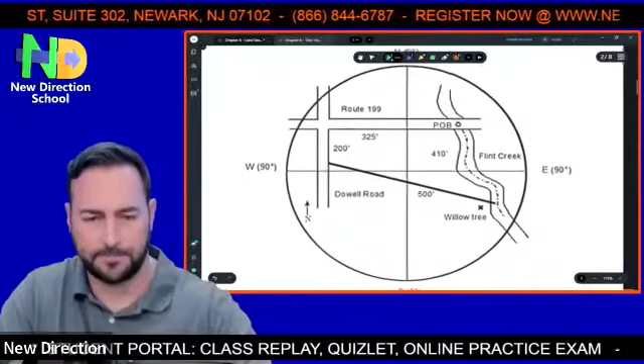Now, this is a typical description. So we're going to look at this image right here, and we're going to identify our property. Ready? Just by looking at it, do you know what your property is? This should be easy because there's only one property here, right? But how do we get to it? How do I identify it? Here's the description.

It says a parcel located in Bucks County, Pennsylvania, having the following description: commencing or beginning at the intersection of the south line of Route 199 and the middle of Flint Creek, thence southeasterly along the center thread of Flint Creek, 410 feet more or less to the Willow Tree landmark. Thence north 65 degrees west, 500 feet more or less to the east line of Dowell Road, and thence north 2 degrees east, 200 feet more or less along the east line of Dowell Road to the south line of Route 199, and thence north 90 degrees east, 325 feet more or less along the south line of Route 199 to the point of beginning.

That's easy, right? We got it, right? Yeah. Some of you are shaking your head at home like, well, this is the easiest description, by the way. Some of you are like, oh my God, how am I going to remember this? I'm going to show you how easy this is.

First of all, let's remove a code word over here. Ready? This word means 'then.' It's as simple as that. So we begin at one point and then we go to another point. That's what it is.

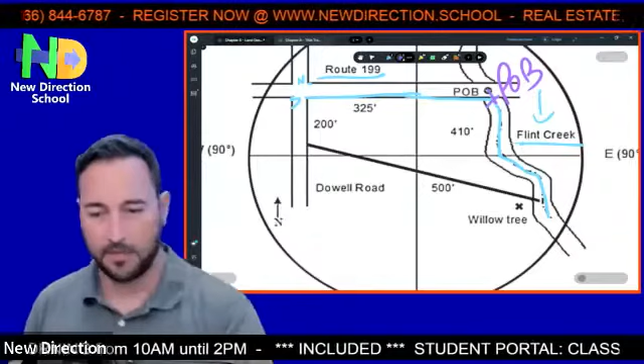So next thing we're going to do is go along this southeasterly until we find what? The willow tree right here. That's the next point. Now that we got here, 410 feet down, more or less. Okay, we're going to go to the next point.

And it says we're going to go north 65 degrees west, 500 feet more or less until we get to the east line of Dowell Road. Now, here's the cool thing, guys, as realtors, we don't have to calculate the degrees and all that stuff, but it's good to know what we're looking at. Surveyors will handle this for us, but it's good to know what we're looking at.

So, 65 degrees, and we're gonna go 500 feet more or less, right? To where? Dowell Road. As soon as we met Dowell Road, right? But it says west line or east line? East line, right? Because this is west, this is east. Okay? And by the way, I forgot to mention, every map will have this right here.

An indicator where north is. So all you have to do is remember where south is, which is the opposite, right? And then where's west and where's east. So you do have to know these two, west and east. North is easy, south is easy. What people usually get confused is with west and east. Why? Because we read left to right, so we say east and west, right?

This is what we're going to talk about. Believe me, if I showed you the images from the previous books, it would be even more complicated. I try to make this as easy as possible.

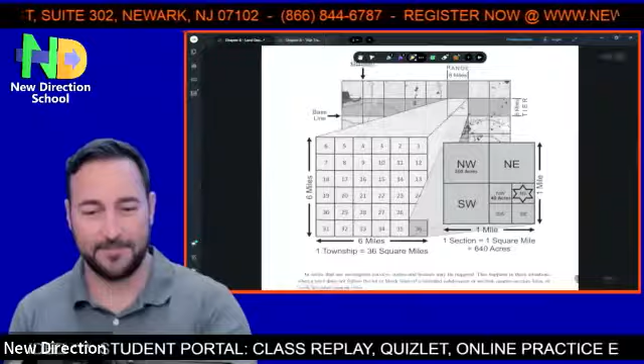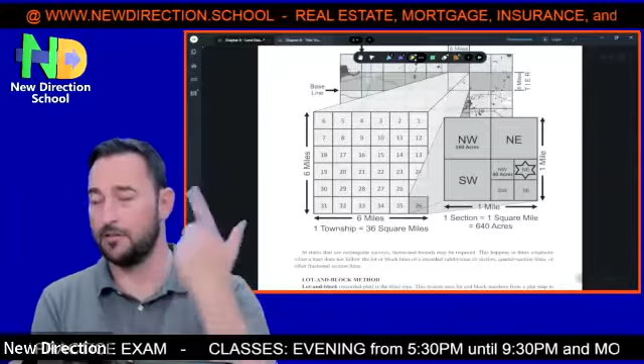That's the township, the state, cities around. We found the township, divided into a bunch of squares. Each square is a section, further divided into more squares or halves. Parcels - a parcel is a piece of land. It could be defined either by metes and bounds, by the rectangular survey system, or the lot and block method.

First you have subdivisions. So we have a big parcel and we can subdivide it into smaller ones.

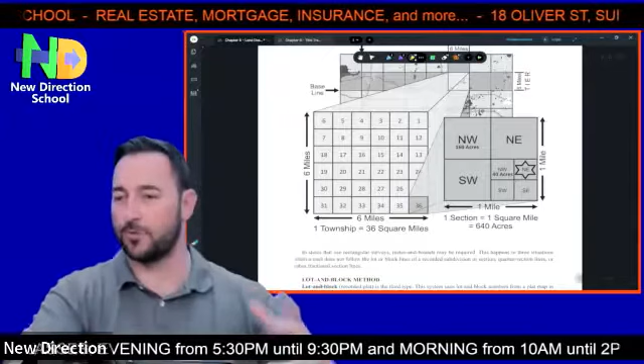Jennifer says it looks awesome, love it. Yeah, I try to make it easy for you, Jen.

So, rectangular survey, or government survey system.

To uniformly describe land acquired by the newly formed federal government, Congress established the rectangular survey system back in 1785. This system, also known as the government survey system, divided land into rectangles, and the survey provided descriptions of the land based on the rectangles in which it was located. Two sets of intersecting lines, principal meridians and baselines, define this. North and south represent the principal meridians, while east and west represent the baselines. Both can be used by referencing longitude and latitude coordinates.

All right, some of you are probably good at this, some of you probably suck at this. It's not easy, but it's okay, I'm going to try to make it happen for you guys. The first time I saw this, I was also confused, just letting you know right now. So it's okay to be confused and it's okay to ask questions.

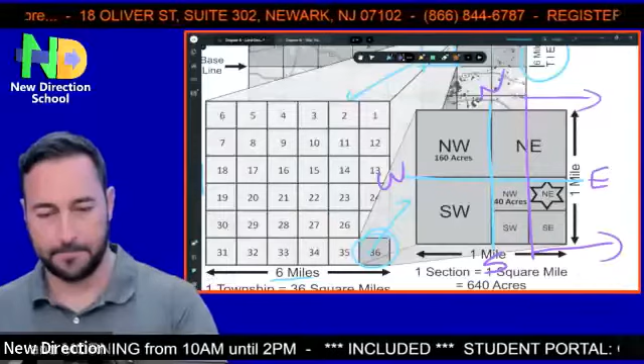So if you see northeast or southeast, it's going to be on that side. If you see northwest or southwest, it's going to be on this side. Anything above is the north, and anything below is the south.

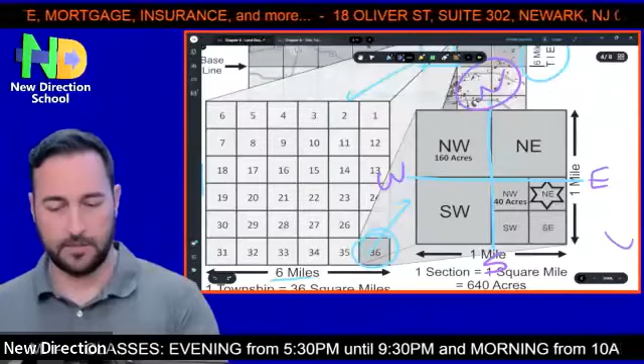So if we want to identify the northwest, well, this is north, this is the west, so that's where the property is located. If we want to identify the southeast, this is south, this is east, so it's located in this quarter right here.

And then we zoom in. Once you zoom in, you have again the triangle here, the star here, so we have again north, south, west, east. Anything on the east side is from the vertical line on, and anything on the west side is from the vertical line towards us.

If instead of quarters it said half, then it would only be north and south, or east and west. So this would have been the half. If our property is located in this half, it would be the south half of the northwest quarter.

Okay, good. You're good so far? Now there's a few things you're going to find in the state exam.

You might have to try to identify the property, where it's located. So they'll give you an image and ask you, hey, where's this property located? Put a star right there. So the northeast quarter of the southeast quarter in this scenario.

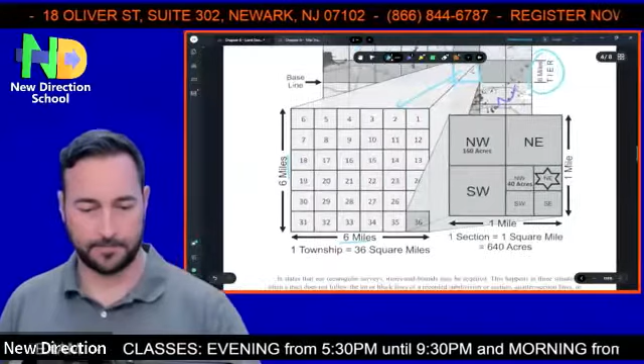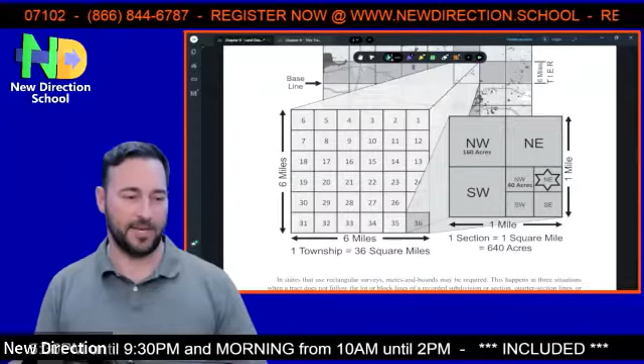Questions? You got it now? Good. Cool.

Isn't it? Come on, it is. It is easy. You just got to remember north, south, and west. Once you figure that out, because look, a lot of people have difficulty with lefts and rights and east and west and all that. Once you narrow those two down, you know exactly where they go.

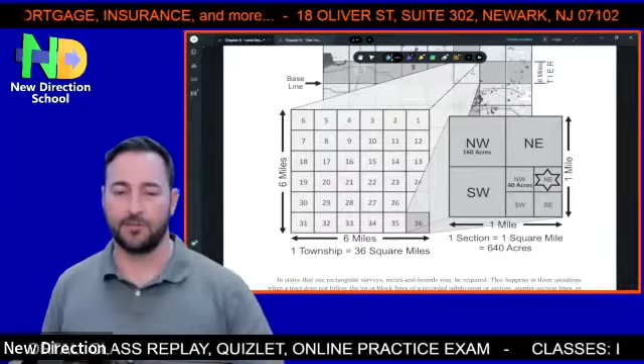It's easy. Okay, if we're trying to identify here, obviously you have the image. Something in the northwest quarter will be here, northeast quarter will be here, southwest, and obviously this would be southeast. Right?

Milton ran away. He's like, no, I don't want this. I'll come for the next one. Michelle, it sounds more complicated than it truly is. And I'll tell you, like everything in real estate, once you get down to it, it's a lot easier.

All right, the next one. Ready? It's the lot and block method. This is the third type of legal description, lot and block method. Very simple, very commonly used nowadays, especially here in Jersey. Block and lots. I'm going to show you also an image in a second.

So this system uses a lot and block numbers from a plat map in the county records. The plat map shows property locations and boundaries for a town, section, or subdivision. The lot and block is used in subdivisions and cities. Two steps comprise a lot and block survey.

First, a large land parcel is described by metes and bounds or rectangular survey. Once surveyed, this large parcel is divided. The lot is the parcel's numerical designation under the lot and block, and the block is its subdivision, the big thing. So the lots are the slices, the block is the whole thing.

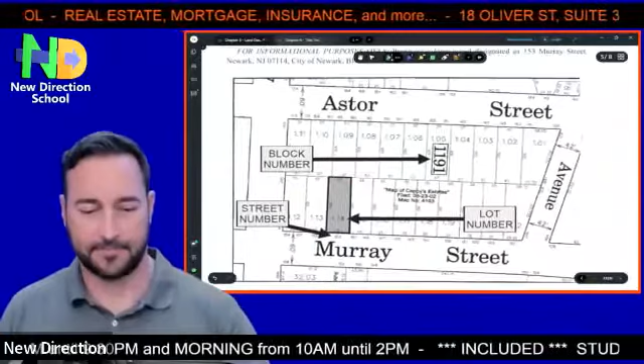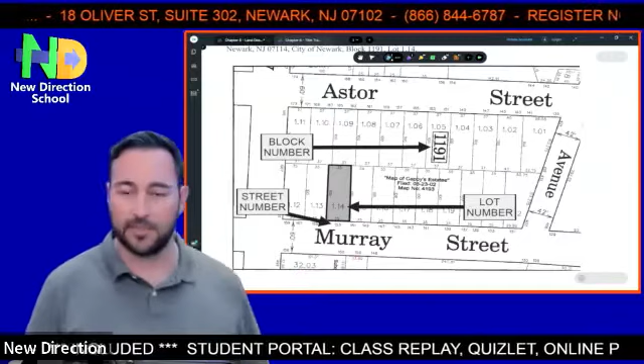In the map, it shows Astor Street, Murray Street. Over here will be Mulberry Avenue. And then from all the blocks, we identify this block, block 1191, because that's what the description said. Once we got to this block, we're going to look for the lot number, 1.14, right? There you go.

We just got to make sure we're in the right subdivision. This is map of Cappy's Estates, whoever the developer was, I guess his name is Cappy. And that's what they call it. And to help out, look what they have as well, a street number.

And it's as easy as that. This is 153 Murray Street right here in Newark. That's it, the easiest description ever.

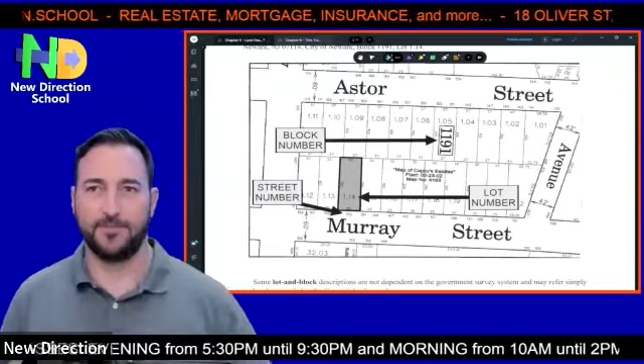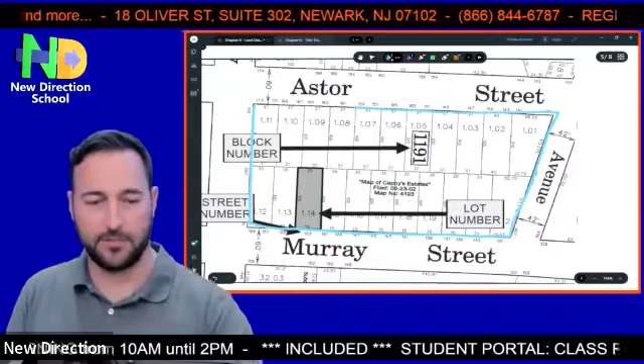Any questions on this one? Where's another name? Right here. Where's like the rest? All of this is the block? The whole thing? Yes, this will be the block. This is a block in the subdivision. This would be another block, this would be another one and another one. And then it's cut into small parcels, which are called lots.

That's the one, the 1.14 in this case. Yeah, good.

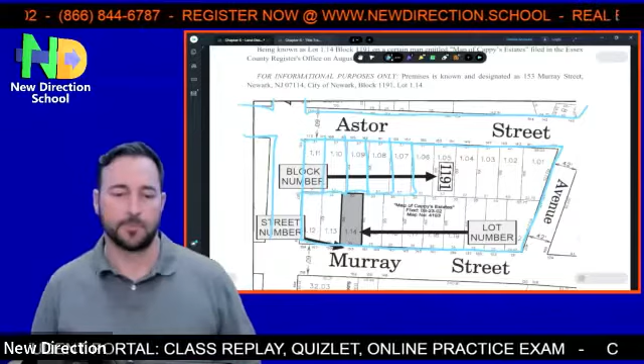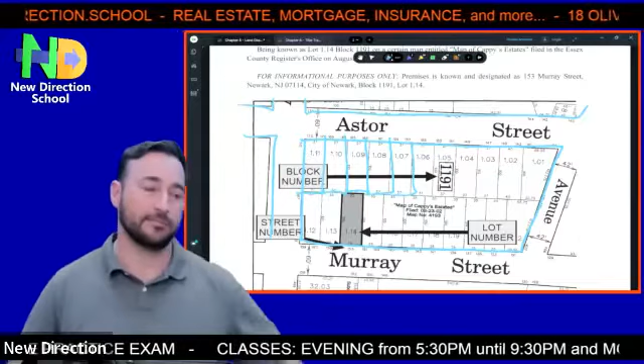When you come to developed townships in Newark, New Jersey, where you have a lot of properties, this is most likely what you're going to see nowadays. If it's an older town that hasn't developed yet, you will see the original metes and bounds description.

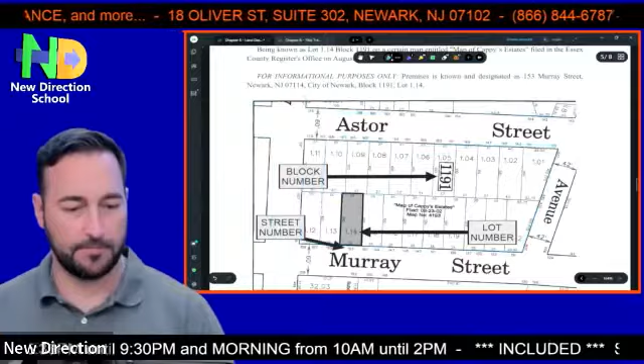Look what it says in the description also: this is for informational purposes only. This is part of the legal description. Premises is known and designated as 153 Murray Street, Newark, New Jersey, City of Newark, Block 1191, Lot 1.14. It's just for quick identification of what it is, but it does not describe the property. It's located there, that's it.

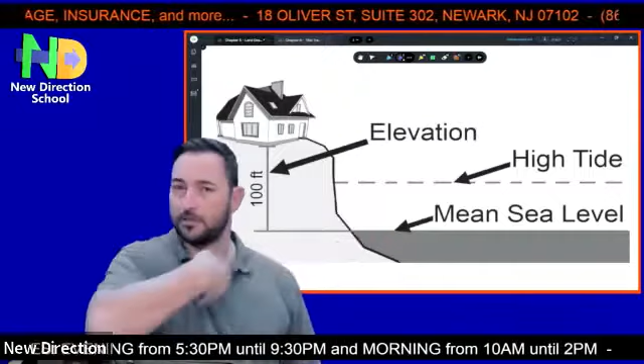Just like everything else, the same way we have a time zone - there's a point of reference for the time zones. We are Eastern Standard Time right now, almost 7 o'clock. In reference to what? We are 5 hours behind that particular reference point, which is GMT, Greenwich Mean Time in London. That's a point of reference, and we go backwards to get to us, and keep going backwards to get to the West Coast. Does that make sense so far?

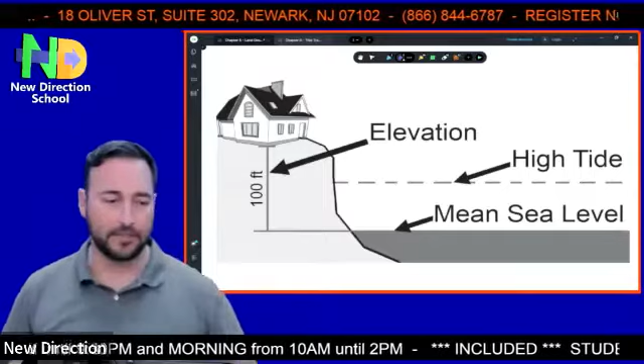For elevation, we identify a point in the water because that's the only thing that's steady. We do have high tides and low tides close to the shore, but once you go further into the ocean, the water has its level. That's it - we call that the mean sea level. Now, a datum has a reference to the mean sea level.

The United States Geological Survey says the official datum is at New York Harbor. That's where they measured and said, this is the point where we start. So even airplanes, when they say 'I'm going 20,000 feet,' where do you think they measure from? From the water, from the ocean. They could be just 1,000 feet above the highest point in the world, but they're 20,000 feet above ocean level.

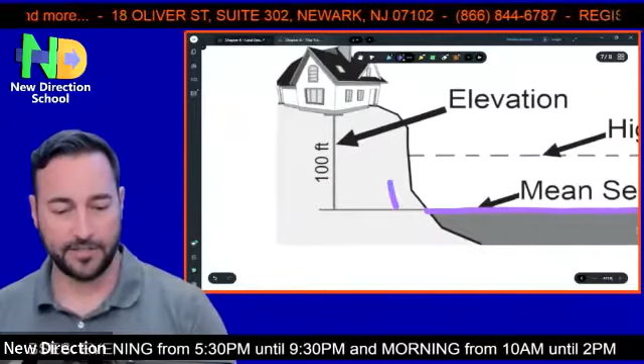You can have a house here, and then another house all the way up here - the ground is not leveled, the water is. Is that good? Water is level, yes.

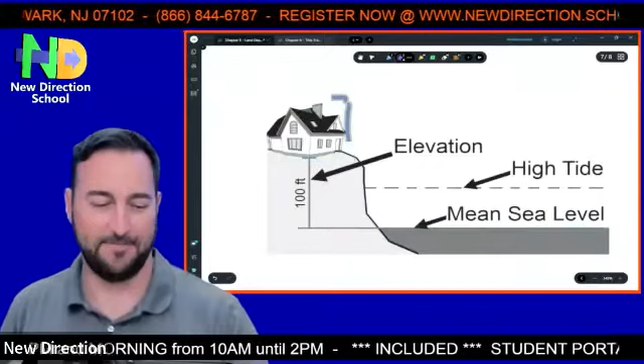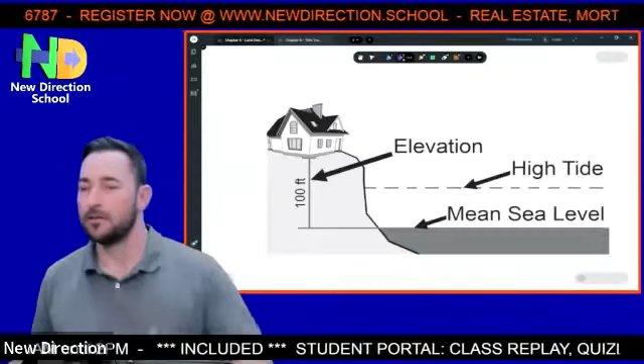Kind of not related, but - nationally we use New York Harbor - what do they use globally, like for an international flight? The same thing. Everybody uses the New York Harbor? All over the world? Yes, the United States Geological Survey was the first one to make that reference point. But then, I'm glad you asked that - do they use that all over the world?

But then they create local datums. Just like we have GMT and Eastern Standard Time, and Mountain Time, and so on - just like we have these different time zones, there are also local datums to reference. Right now it's 7 o'clock, but that's not the original time because we're 5 hours away from the original point - it's midnight at point zero. Does that make sense?

So here's the same thing - where's the level of the ocean? It's at New York Harbor, but we're not in New York, we're in Newark, New Jersey. So we find a local datum that makes reference to the original one, just like time zones. These local datums are referenced by monuments called benchmarks.

So I already addressed these two with your question. And that is it for this chapter.